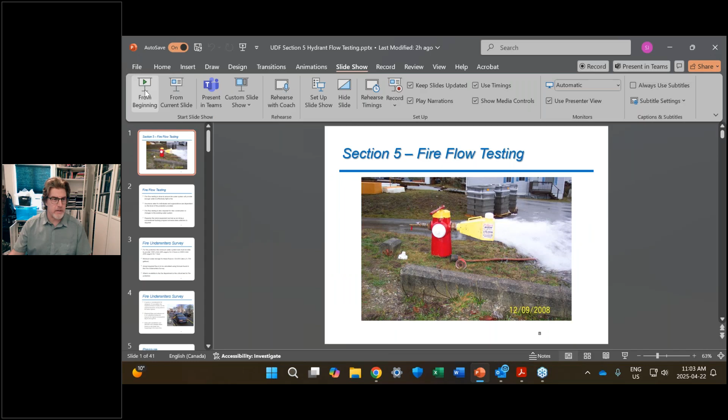Welcome everyone to this presentation on fire flow testing of hydrants. Now I know for some of you, or maybe a lot of you, this may not be completely applicable. You might not have a lot of hydrants in your system, or you might not have enough reservoir capacity to actually do a proper fire flow test. But it is something important to at least conduct for your system and have some idea of the hydraulic capacity of your system. So we'll run through the procedure here, and once again, if you have any questions, please put them in the chat, and we'll get to those at the end of the presentation.

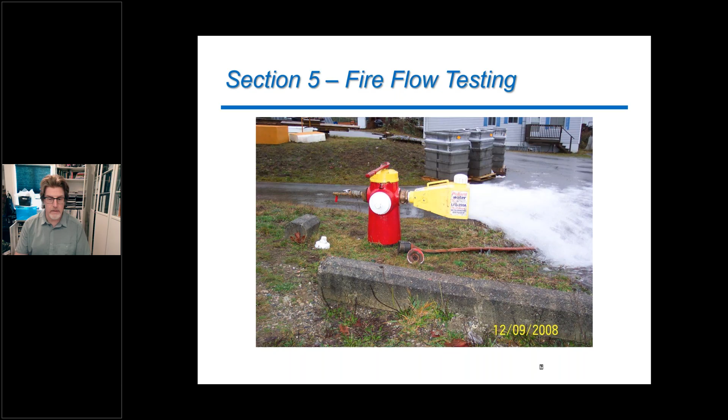So for fire flow testing, it is a way for us to look at the capacity of our water system and how that capacity might meet the requirements for fighting a fire in our system. The testing for fire flow is not that complex, but it does require some equipment and some testing to be done for the system itself.

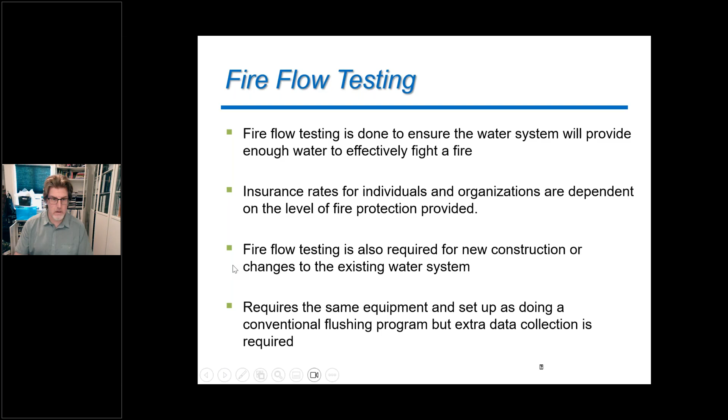The first thing is the Fire Underwriters Survey. This is the organization that insurance companies use to try to determine what the water supply requirements are for a system to be able to capably fight a fire.

Now we're going to look real quickly at a formula that they use, but there are a couple of benchmarks we look at inside the Fire Underwriter Survey. The first one, at the very minimum, your water system needs to be able to provide 1,000 liters per minute for 2 hours, or conversely, 2,000 liters per minute for 1 hour, to effectively fight a fire. So right away, that comes out to a storage capacity of 120,000 liters just to meet the very bare minimum for the Fire Underwriter Survey.

Now, that might already eliminate some of your systems as far as your reservoir capacity or pump capacity that you have available to you. There is an actual formula within the Fire Underwriter Survey that we can look at here.

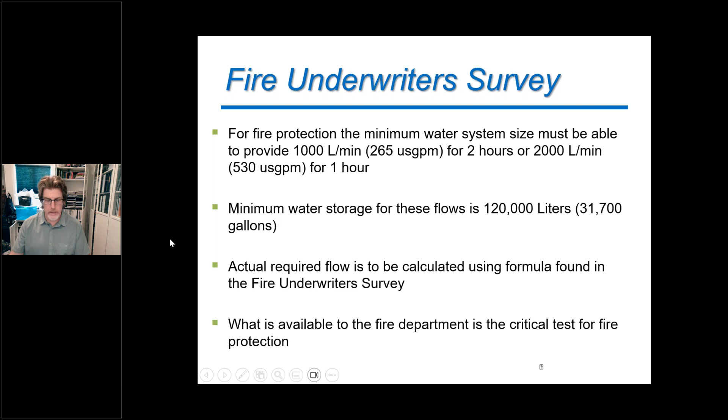I'm going to skip by that one. We're going to go to this one here.

One of the parts of the Fire Underwriter Survey and the fire flow testing is the pressure in your water system. The higher the pressure, generally the more water we can move throughout the system, and that's why a lot of small water systems may be installing fire pumps as part of their system, so that when we need a lot of water, we're able to push it out of our reservoirs and get it down to where it's needed.

One of the key things in fire flow testing is we look at the maximum amount of water we can move to a certain point in our water system while still maintaining 20 PSI throughout the entire system. When we drop below 20 PSI, that's when we enter a danger area for back siphonage into our water system. So we want to always maintain that strong positive pressure so we're not sucking water out of homes or other buildings when we are fighting a fire.

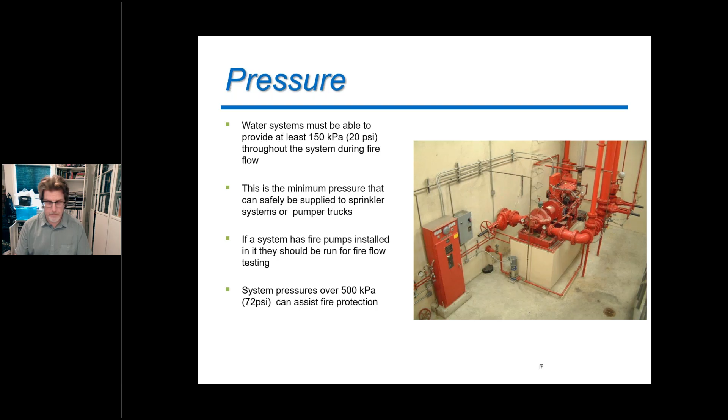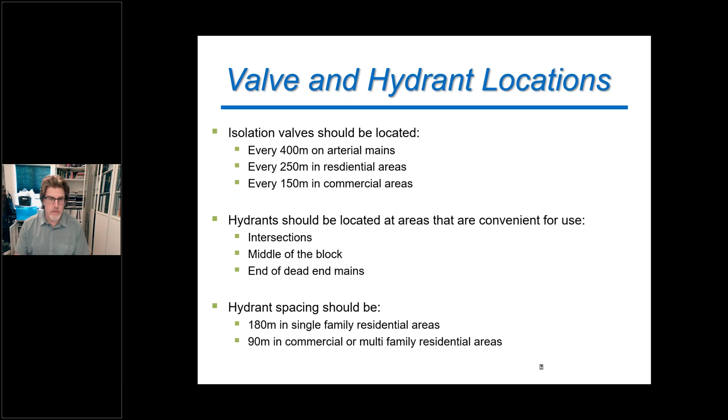The Fire Underwriter Survey also has quick points about where valves and hydrants should be located in your system, and they specify what type of hydrants you should have. One key thing is that fire hydrants should be supplied by mains that are at least 150 millimeters, or at least 6-inch mains, as a minimum, and that hydrants should have at least two 2.5-inch or 65 millimeter outlets.

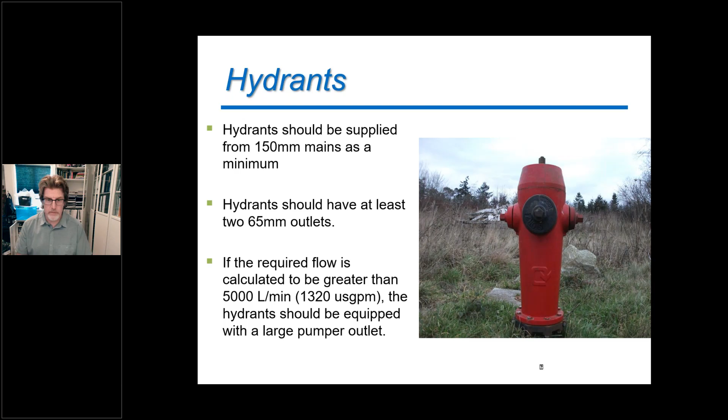If the calculated fire flow for your system, through the Fire Underwriter Survey, is going to be greater than 5,000 liters per minute, that is where you need to be able to provide a pumper outlet on your hydrant. If your calculated flow is less than that, around 4,000 liters per minute, you don't need a pumper port, but it would be advisable to have one anyway.

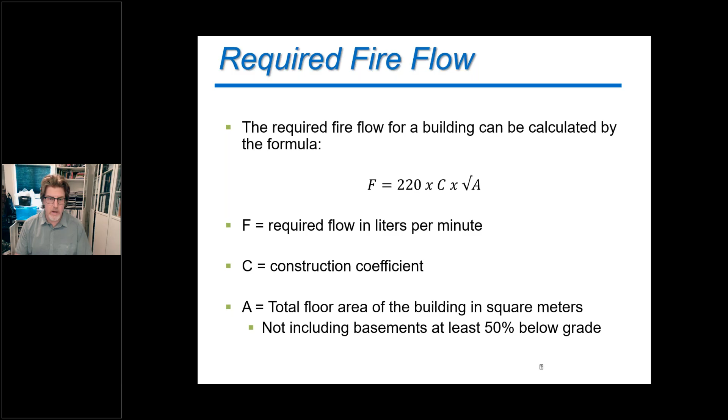From that formula, there ends up being more to it, and I'll go through this fairly quickly since it's not something you'd normally do. You have to add in the construction coefficient: what is the building built out of? Is it wood frame construction, or is it brick construction? That changes the flow that's required.

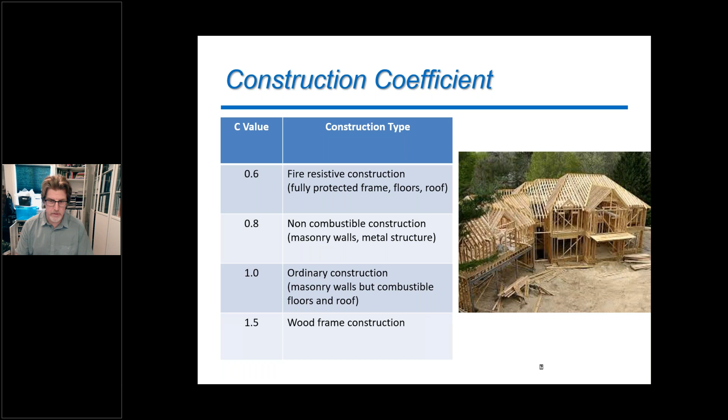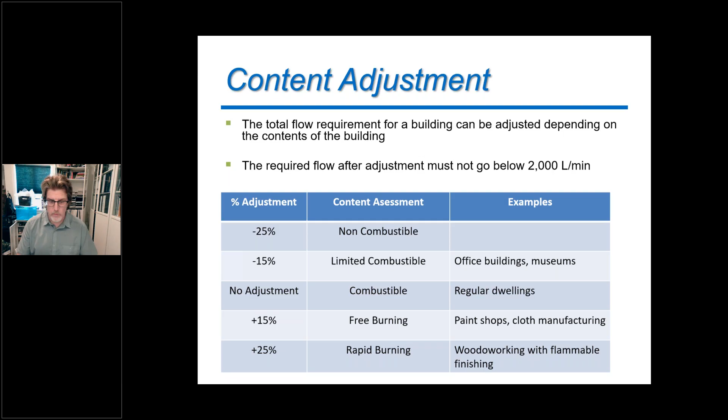What's going to be inside the building also changes the flow. Is it a woodworking building with lots of flammable finishes? That's going to increase the required flow. Is there a sprinkler system installed in the building? If there is, that will reduce the required flow needed inside that building.

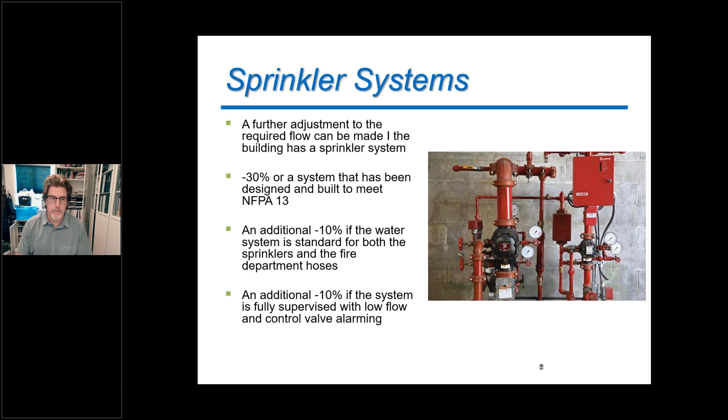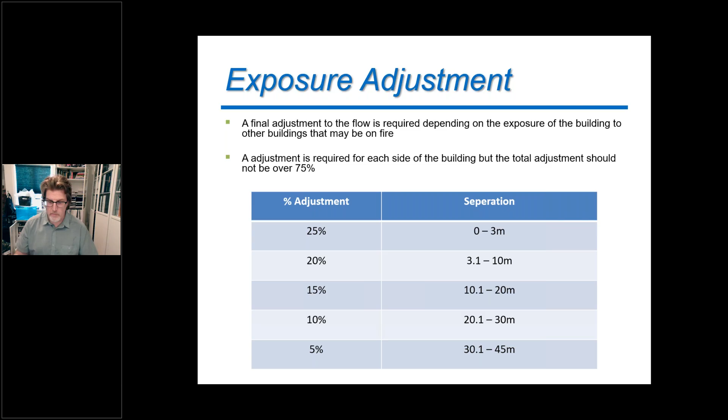This is a big one, especially in the last couple of years—we've heard this one quite a bit: what is your exposure? How close is your building to some other combustible building or material? How close is the tree line? How close is the neighboring house? If you have your homes packed in nice and tight together, we have to do an adjustment on the fire flow because of the danger of fire spreading to other nearby buildings.

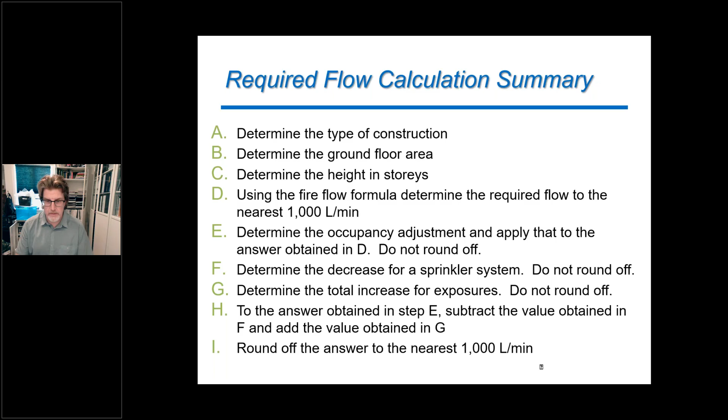Now we can add all those things together. We've gone from that very simple formula we started with, and now we add in all these increases or decreases depending on the specifics of the building we're looking at. From that, we end up with a value.

After all that, the Fire Underwriters Survey also gives you a shortcut: if we're just looking at single or multifamily dwellings that do not exceed 2 stories in height, we can just use the shortcut formula.

Generally for designing or measuring fire flows inside a system, we use 4,000 liters per minute as our benchmark, because that is seen as a 2-story wood frame building with exposure between 3 to 10 meters—so your neighboring house is maybe 10 meters off to the side, which is a pretty general way homes are constructed. So once again, we use that 4,000 liters, or just over 1,000 gallons per minute, as our benchmark when doing a fire flow test.

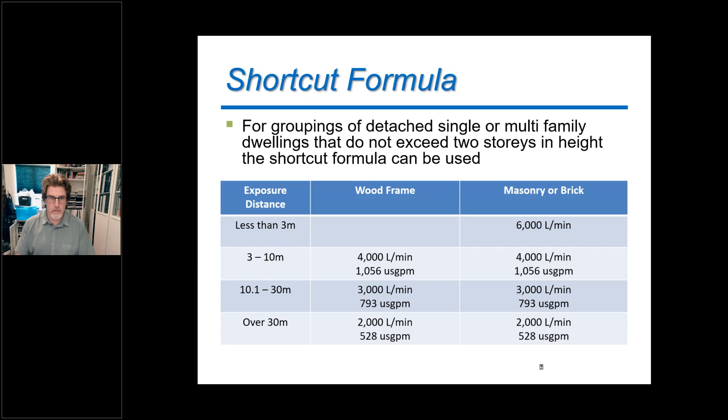Now we also have to make some very final adjustments too. If the home has cedar shake roofing, that's going to require a lot more flow than to try to fight a fire with our water system in those types of homes.

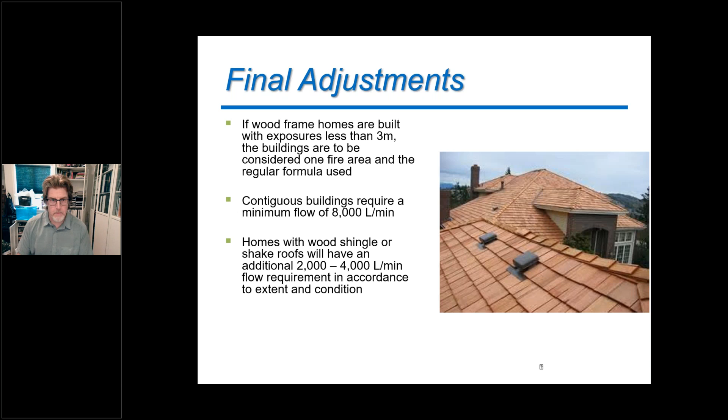We're not going to go run through a worksheet right now. This is something I do if we were in class, we would do a worksheet for the building that we were located in and try to work out that fire flow. But generally we just use 4,000 liters per minute, or 1,000 gallons per minute, as our bench line. If we can get higher than that, we have good fire protection in our system. If we're below that, then maybe we have to look a little bit more in depth, and see if there's something we can change about our system to provide better fire flows.

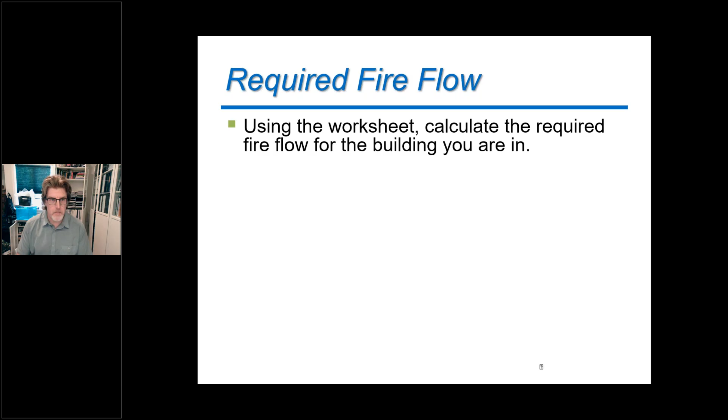Now, this also goes back to our reservoirs inside of our system, and this idea that a large portion of our reservoirs is really just based around trying to meet these fire flows. So we have a very small amount of space inside of our reservoirs that is actually just used for domestic water use, right? That's kind of the pump on, normal pump on, pump off -- that's our operational storage inside of the reservoir. But the vast volume of it is used for that emergency, or our fire storage.

And that's where, once again, we're looking at having 120,000 liters as a minimum in that emergency or fire storage. We need to be able to not only produce these flows, but maintain these high flows for long periods of time.

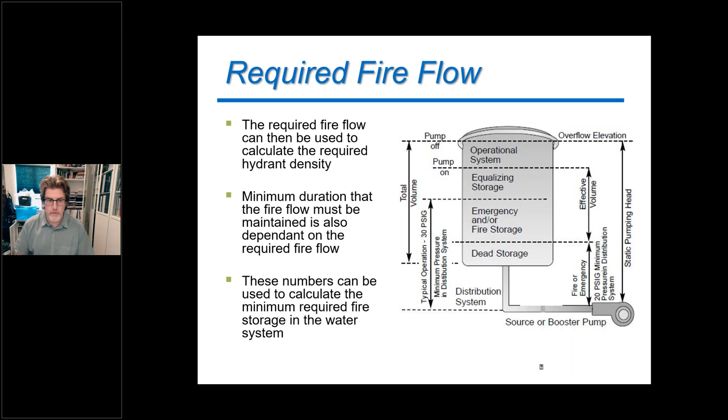So we've gone through, possibly done some calculations, or we've just said, hey, we're going to use the shortcut. I want to see, can my system deliver that 4,000 liters per minute if required? So what we're going to have to do is go out and do some field testing and see what that actually is.

So we're going to be using some hydrants. If you're looking very specifically for one of the buildings inside of your system, you're going to be using the hydrant that is located closest to that building.

Now, the values that we get from this, we can extrapolate that data. We can look at trying to make some changes to the water system infrastructure, maybe if our fire flows are not meeting those minimum values. So whether that means we have a case to build a larger reservoir, or a case to upgrade the water mains to a larger size, or possibly loop those water mains because we're not able to meet the flows that the Fire Underwriters Survey says we should have to meet.

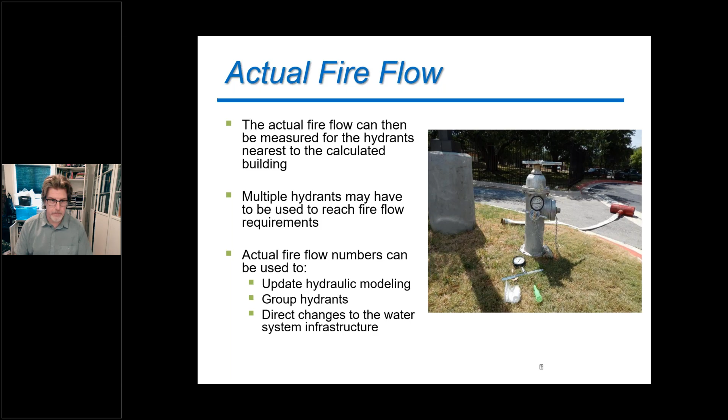Now, one thing to be very clear here as we go through the next few slides, and there's a handout available to you, is that when we're talking about fire flows here, we're talking about the main capacity. So what is the maximum amount of water that we can draw out of our water system at a certain point in our water system?

Now, if a lot of you have maybe done some hydrant flushing and you've put a diffuser with a flow meter while doing hydrant flushing, that's great, really good information, and that's actually part of the fire flow test. But that is something we call the hydrant capacity.

So, what is the normal flow coming out of a port of the hydrant when we open it up? Once again, for fire flow testing, we're going to look at what is the maximum we can take out and still maintain that 20 psi in the water system. So that is what the fire flow test is going to be.

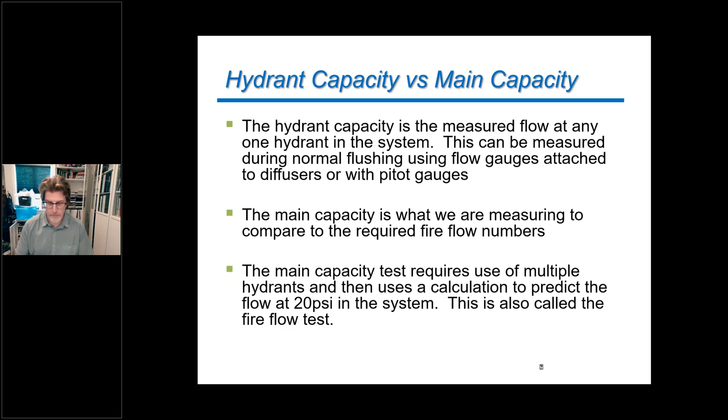So to do this, we use a lot of the same procedures and equipment that you might be using as part of your regular flushing, or part of your regular maintenance on the hydrants. But we still need to go through proper planning. What are the hydrants we're going to flush from? Make sure we have all the proper equipment available to collect the data we need for the fire flow test. We also have to pay attention -- we're not going to be flowing water for long periods of time or large volumes of water, but we need to dechlorinate that.

We need to make sure we know where that water is being discharged, so we're not flooding out someone's driveway, or making sure we have that discharge under control. We also want to make sure we have lots of water in the reservoirs.

So, is our reservoir full when we are going to do this test? Another key thing for fire flow testing is if you do have a fire pump, the fire pump should be running when you do this test. As I mentioned, we're only going to be running the flows for very short durations, just to collect some data from our system.

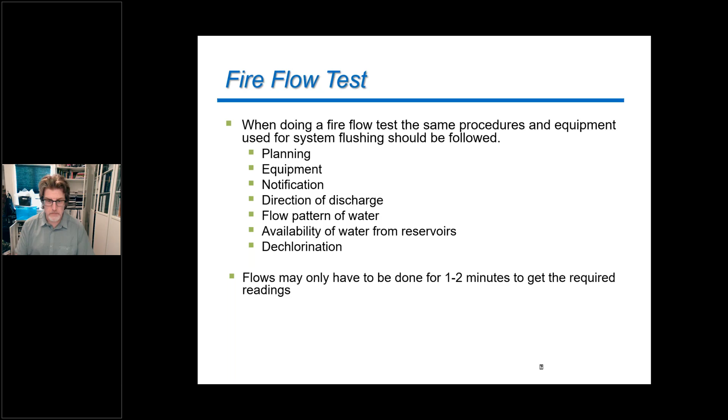But this is the hydrant that we are going to add a pressure gauge to, and we're going to measure the pressure constantly at this hydrant while we are conducting the test.

Now the flow hydrant, that one is the next hydrant downstream from our test hydrant or pressure hydrant. That is the one we're going to add our flow measuring equipment to. This is very key. This is the one we're going to open up and start discharging water, but we need some way to accurately measure the flow coming out of that hydrant.

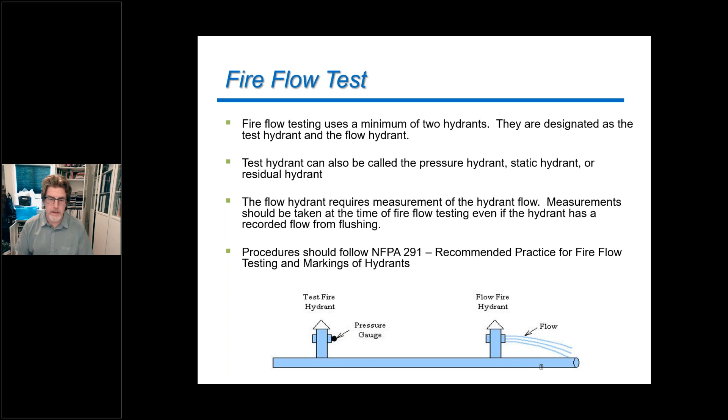So in its simplest form, this is what we're going to do. We're going to look at our system and designate, okay, this here is my test hydrant, and the next hydrant downstream is going to be my flow hydrant.

I'm going to go to the test hydrant, put a pressure gauge on it, open that hydrant fully, and measure the static pressure at that test hydrant. Then I'm going to go downstream and look at the flow hydrant, and start documenting some information.

What was the size of the water main that is going between these two hydrants? What is the inner diameter of the hydrant nozzle that I'm going to use? Is it a 2.5-inch nozzle, or is there some other manufacturer with a slightly different size?

I'm going to show a diagram here later, but we're also going to look at the hydrant nozzle. How smooth is the transition inside of the hydrant going to that nozzle? Is it a nice curved edge, or is it a harsh 90-degree sharp edge between the inside of the hydrant and that nozzle? So I need to record that information.

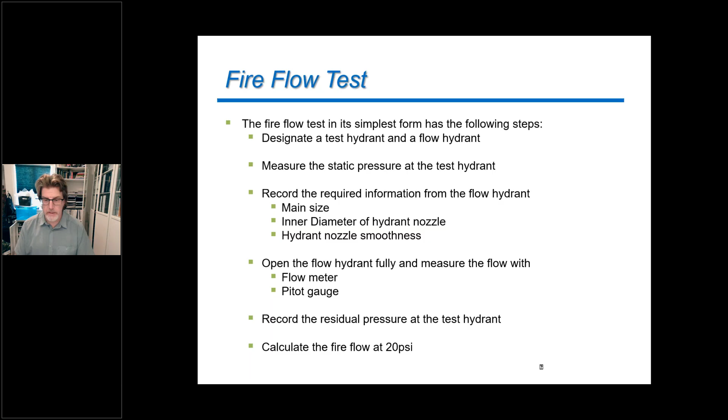The other thing you can do if you have a loop system is run the test in two different directions. So you can open up hydrants on both sides of the hydrant you're measuring the pressure from, and compare the results. The results should generally be close to one another, but it's a good way to also confirm what the flows are that you're getting with your system.

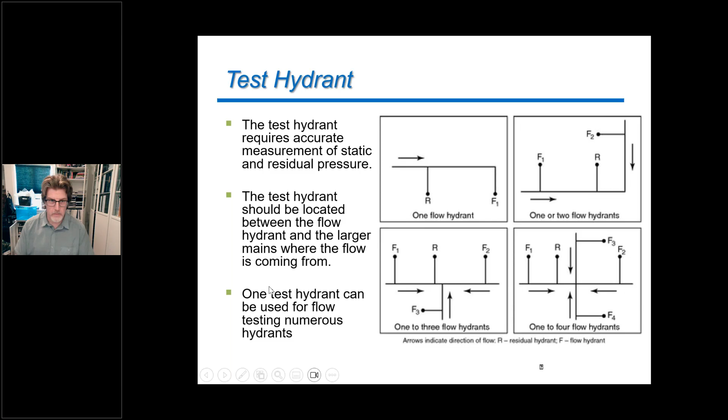Now for the taking of the pressure, this one is very, very important. Like any type of calculation, you have to put good data into the formula to get a good result. So the more accurate that you can measure the pressure, and we're going to show later here, the more accurate that you can measure the flow coming out of the hydrant, the better your results are going to be.

If you are just using a direct read pressure gauge, then the more accurate that pressure gauge is to the maximum or minimum pressures you're going to achieve in that system, the better off you are. So once again, if your normal pressure in your water system is only 60 psi, then using a 0 to 200 psi pressure gauge is not going to give you great accuracy for your readings. You're going to want a pressure gauge that is a little tighter and closer to the pressures in your system. If you can get a 0 to 100 gauge, that will improve the accuracy of your readings.

You also, if you're doing this with two people, which is very common, will have someone standing down at the hydrant recording the pressure, while you are recording the flow. Once you have taken that flow reading, you need some way to alert the person at the other hydrant that it's time to take your pressure reading again. And if you don't have two people, or you want to improve your accuracy a little more, one of the things you can look at is adding some sort of pressure logger onto your test hydrant.

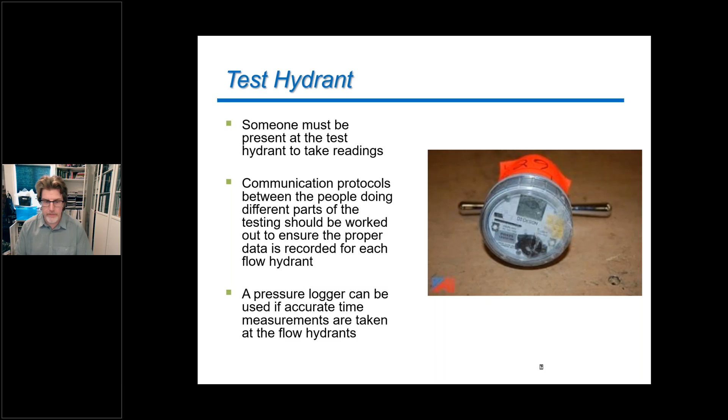So once again, if let's say your static pressure in your system is 80 psi, when I open up the fire hydrant, I want to see that pressure in the residual hydrant drop to at least 60 or lower. If it doesn't go below 60, then I need to increase the flow. The higher the flow I can get, the more pressure drop I should see. So I might have to open up a second port on the flow hydrant, or change my setup and maybe flow 2 hydrants at the same time to get enough flow to see that pressure drop.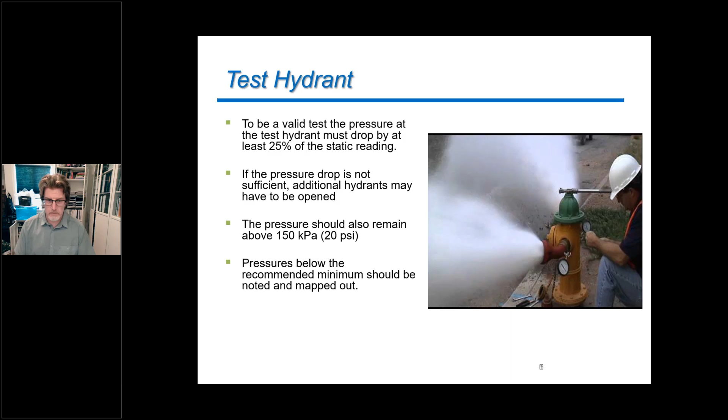Now, if you have one with a very sharp or 90-degree bend inside the hydrant going to the port, you need to note that because you're going to use a different formula. This relates to the flow pattern the water has to make - if it has to go around that sharp 90-degree bend, we get large friction losses, meaning less flow out of those types of hydrants. That's why most modern hydrants have a nice smooth inlet going from the inside of the hydrant to the outlet port.

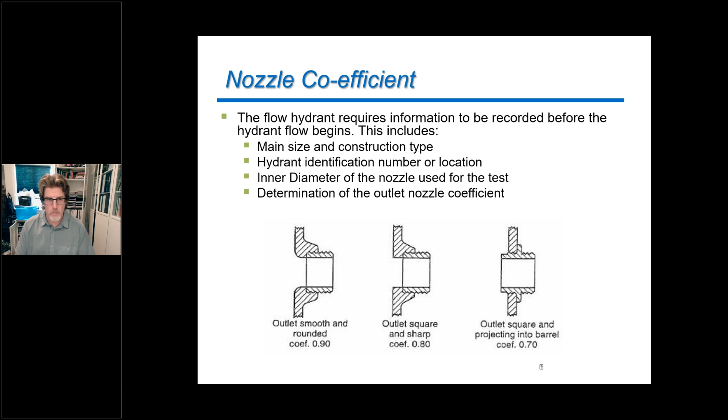Now, measuring the hydrant flow - we're going to have the hydrant open fully. If we've got a fire flow pump, the pump is running, and we're trying to get the maximum amount of flow that we can out of here. We've got to have some way to accurately measure that flow.

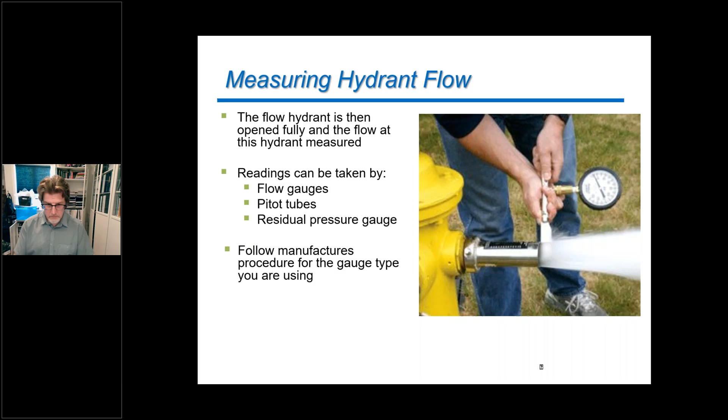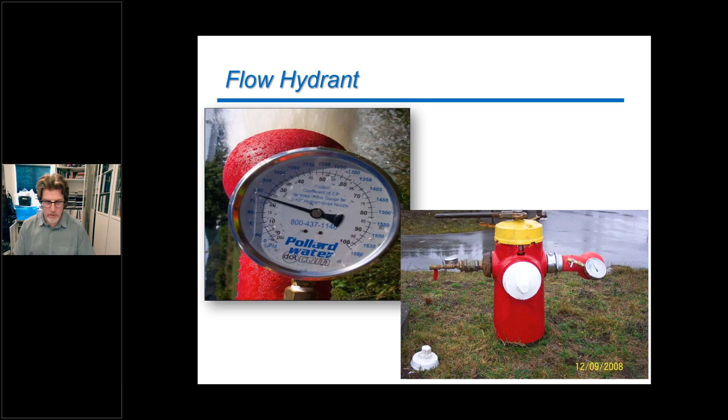It's also a good way to check that your pitot is working. But if you didn't have the pitot shown in this diagram, this is a way you can try the measurement. Let's say my pressure when I started the test, when it was static, was 80 psi, and when I was flowing the hydrant at its maximum, the pressure was 40 psi on the opposite ear of that hydrant. I could look at the chart, and it would tell me my flow is 961 gallons per minute because I had a 40 PSI difference between the starting pressure and the reading when the hydrant was fully open.

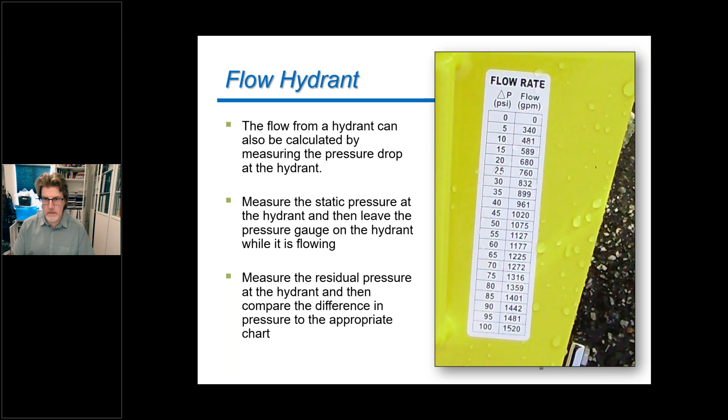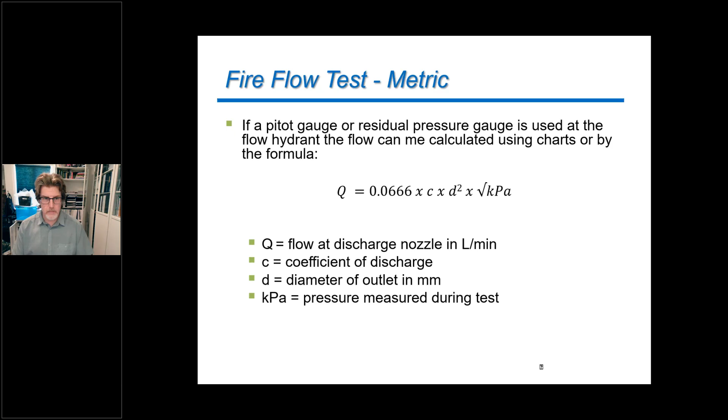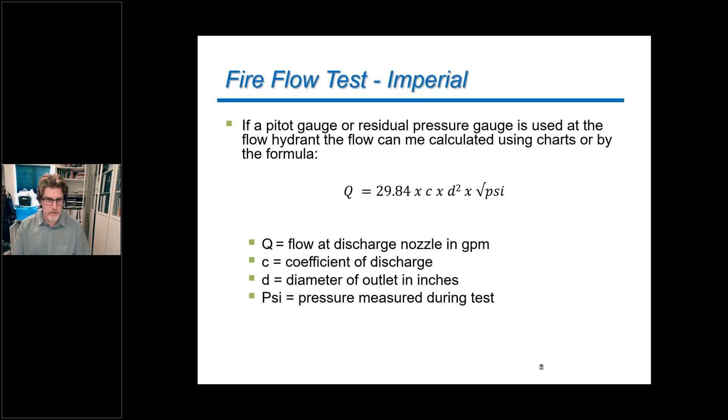I'm going to skip by that, and we won't do an example here, just to make sure we save time.

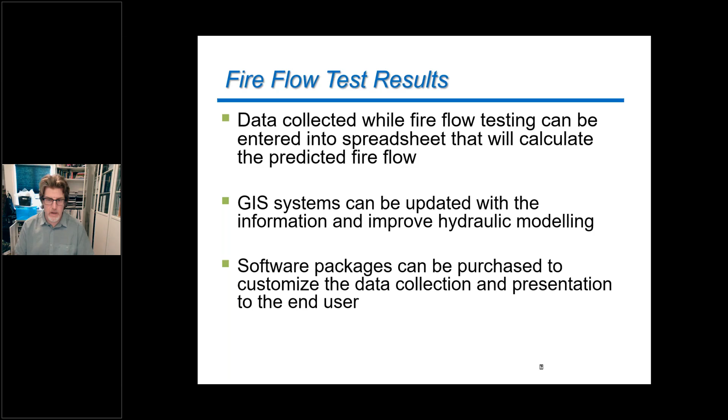Now, when we get the data that we've collected from our fire flow test, we can enter that into a spreadsheet, and we can use this to calculate predicted fire flows for later events. If we're working with an engineer who wants to do hydraulic modeling of our system, this would be great data to give them to help their modeling system.

Now, this is what we do with the results. This is a very simplified graph that we have. But hopefully we remember back to grade 5 geometry, when we did graphs, one of the things we were taught was that if at any time you have 2 points, you can draw a line.

So in this test, for this one example, we had 2 points of data. I had 0 flow, and I tested the fire hydrant, and when there was no flow, the static pressure in the system was 75 PSI. So that is 1 point of data. Then we conducted the test, and my second point was down at the bottom of the solid red line. When the flow was about 4,500 gallons per minute coming out of the system, the pressure was about 28 PSI. So if I have 2 points, I can draw a line.

Now when I draw my line, I can extend it and see where it crosses the 20 PSI limit. And that is what our fire flow test is trying to determine: what is the maximum flow we can get in the system and still maintain 20 PSI. In this case, this one crosses the 20 PSI line at just under 5,000 gallons per minute. So, a very large system with lots of flow available from the hydrants here.

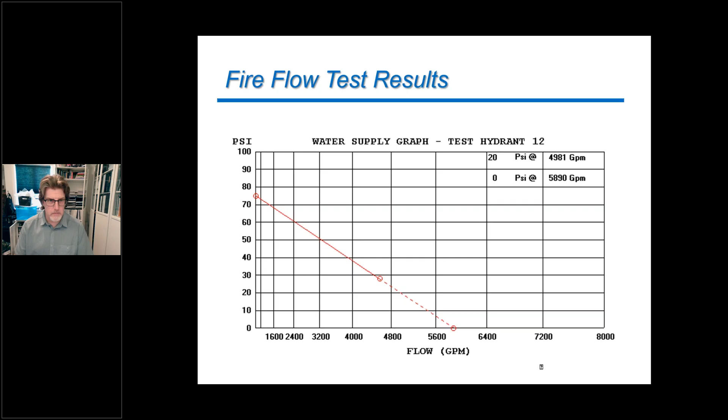Now, the other thing we can do once we've finished the fire flow test is follow the Fire Underwriters Survey color codes that you should paint or identify your hydrants with, depending on the flows available. This indicates to the fire department coming to serve your neighborhood or small water system quickly: hey, at this hydrant I'm not going to get a lot of water because the top and nozzle colors are painted red.

Or they show up and it's light blue, and they know this hydrant will give them a lot of water. So they can hook up to a pumper port and connect their pumper truck to this hydrant because there's going to be lots of water available at this point.

Now, this is something I don't see a lot of small water systems doing, is color coding their hydrants. This isn't the body of the hydrant, we're just talking about the very top cap of the hydrant here. But if you keep your eyes open in some of the larger municipalities, you should notice this.

You'll start seeing that their hydrants are all red, but in this neighborhood the tops of the hydrants are blue. And moving on, the tops of the hydrants in this neighborhood are green. That's just a way to quickly identify to firefighters what type of flow they can expect from the hydrant when they hook up to it.

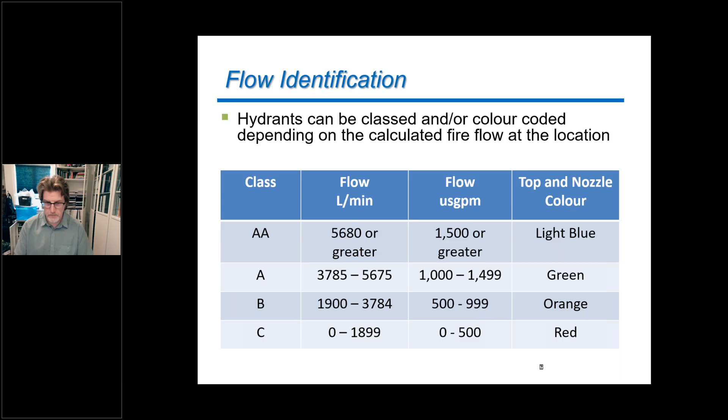So these are just some pictures of different hydrants and what we're going to do for the color coding. Once again, it's not the body of the hydrant that we're looking at, it's the top cap of the hydrant that we are painting the color that corresponds to the flow that is available.

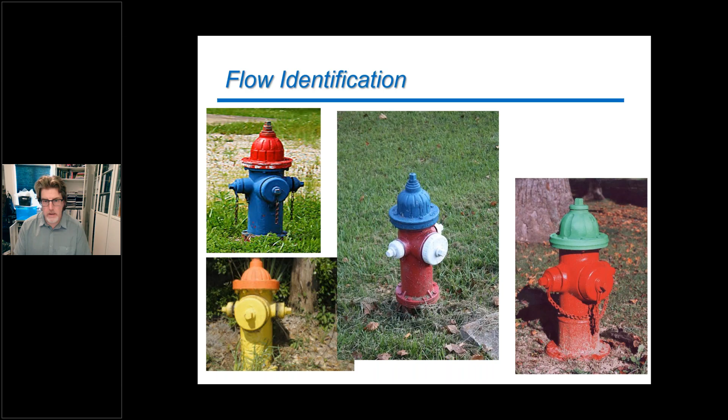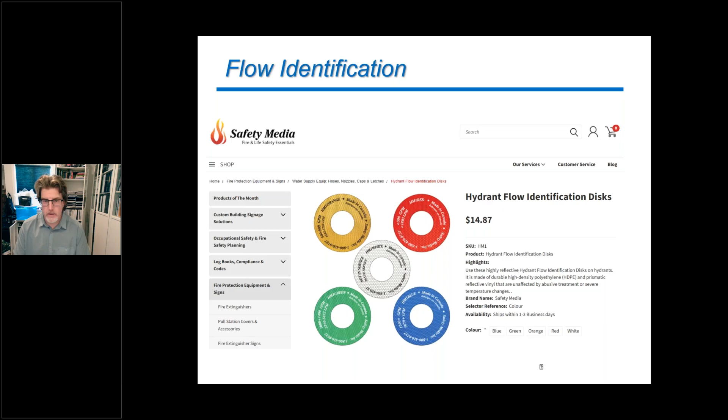If you don't want to paint the hydrants, another popular option is to use hydrant flow identification discs. You can buy them in the different colors you need and attach those onto the side ports of the fire hydrant. So what you end up with is something like this diagram here, where they've done both - they've painted the top of the hydrant the proper color code, but also added the disc to the side port.

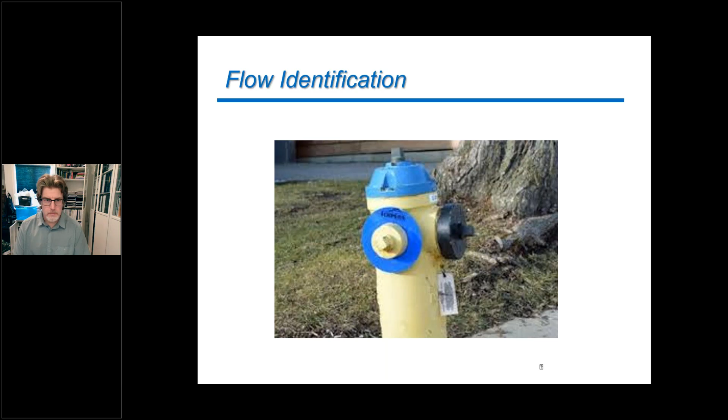I'm going to now quickly show you some of the shortcut stuff here. One of the main companies you might be buying diffusers from is called Hose Monster. This is their hydrant flow test calculator that they make available. If you do a Google search, just type in hydrant flow test calculator and there will be a never-ending list of different ones you can use.

I find this one is the best one that's readily available. Once again, rather than doing that complex calculation when you have your data, you can go to their website and just enter your data into their calculator. It's going to come out in gallons per minute, and they're going to use PSI, so make sure you take your readings in that case.

So in this example, I said, hey, I've got my small water system. I went and measured the static pressure - before I started flowing water, it was 60 PSI. Then I opened up the hydrant fully, and I got 600 gallons per minute flowing out of my flow hydrant. So that's another data point I've got.

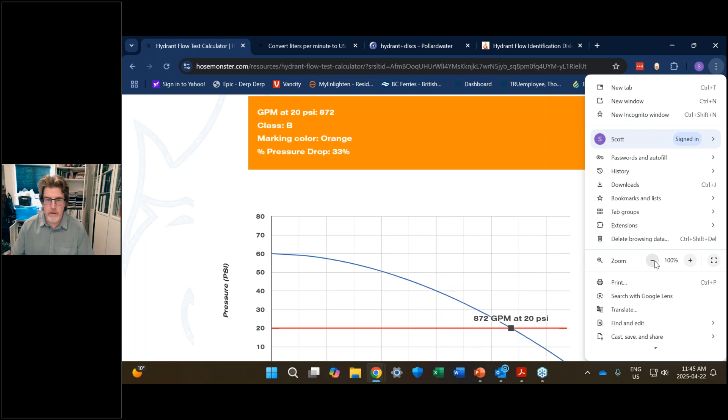I can press the calculate button, and I can scroll down and they give me the data for my hydrant here. I'll make that a little bit smaller so it all fits. They give me the graph and they give me the calculation.

So they say, well, from the data you gave, yes, you got the right pressure drop, but this is going to be an orange coded hydrant. And at 20 PSI, the maximum you're going to get out of that hydrant is going to be 872 gallons per minute.

So for that hydrant, one of the things I would look at right away is - I could go back to the Fire Underwriters Survey and they would be able to tell me that for a single family 2-story home, the minimum is supposed to be 1,056 gallons per minute. So I'm not meeting those minimum fire flows that are required to provide fire protection in my system.

So at this point, I would have to start looking at how am I going to change my system? Am I going to have to install a fire flow pump? Do I need a larger reservoir to give myself some extra capacity and maybe have that reservoir be a little bit higher, which will give me more pressure in the system and increase my flow? Do I need to increase the size of the water mains? Or do I need to loop my system to get more flow at this point?

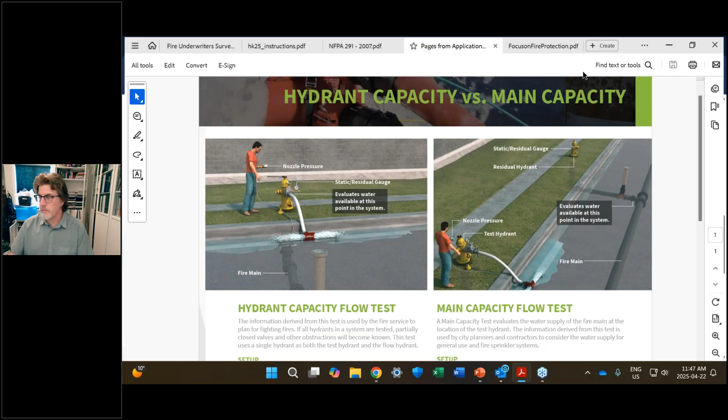This is one of the handouts to show the difference between your regular hydrant maintenance and measuring flow during that, compared to what we're talking about here, which is the main capacity flow test. That's what the fire flow test happens to be.

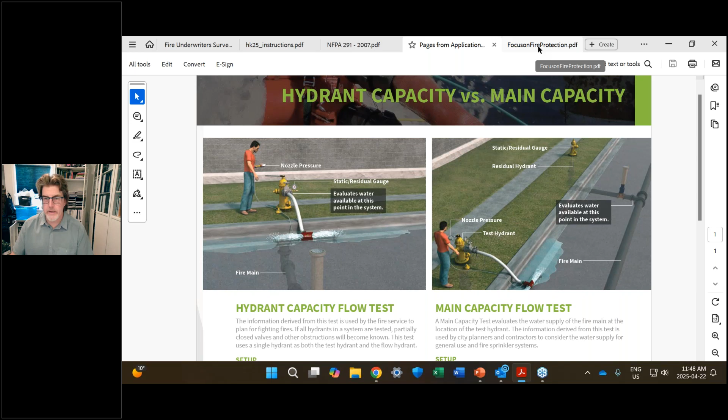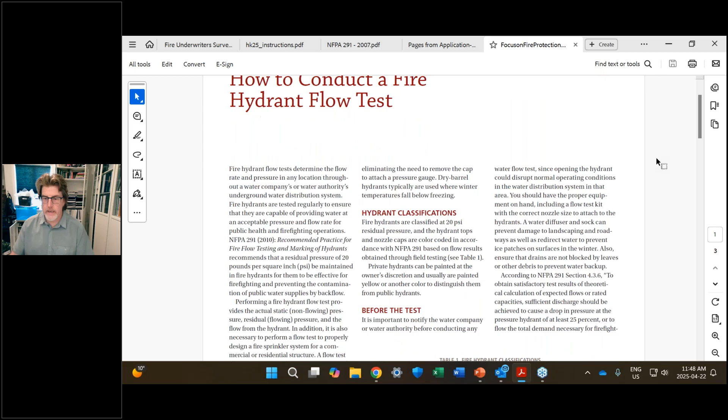They'll make my presentation available to you if you want to follow along. I also added some handouts that have been in some trade magazines, which also run through how to do this test, what measurements you have to take.

And how to do the calculation for that test. This is something recommended that all systems do at least once every 5 years, or any time you've made large changes to your infrastructure. So if you've installed new pipe, or changed the flow pattern by closing off or making a loop in your system, you can go back and check how those changes have affected your ability to fight fires with your system.

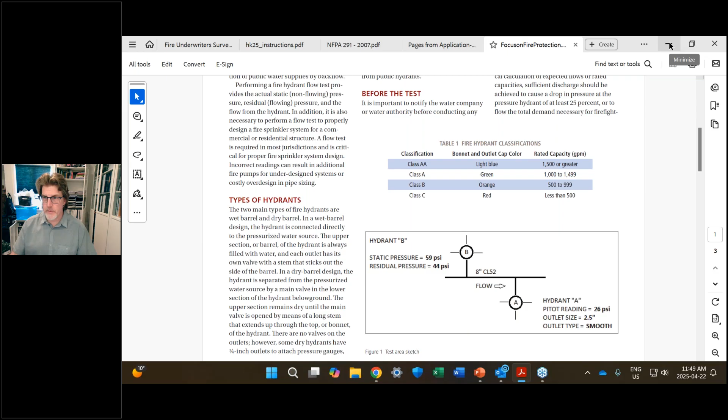That's all the information I have at this point. So I'll turn this back over to Satwinder, and again, just see if you have any questions about what we presented here today.

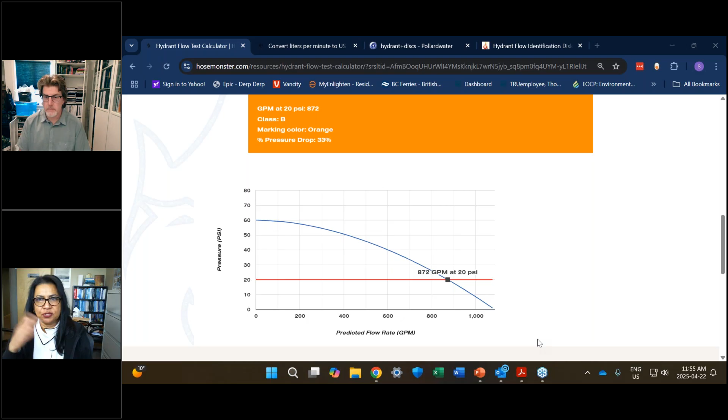So if your community is going through a growth period, should that testing be done more frequently? Yes. The 3 to 5 years is the recommendation if your system has not had any large infrastructure changes. Anytime you do upgrade pipe sizes, close off loops, or add a new subdivision and new section of piping onto your system, you should redo those fire flow tests.

Question from John: why is the pressure drop of 20% important? I know you said in your presentation 25%, but yeah, why is that pressure drop important?

John, that's people who are much smarter than me and work in stats that have come up with that benchmark to try to determine that the data is going to be able to make a good line. When you're extrapolating data like this with a line, if your two points are very close together, that just increases the error when we're extrapolating that data further away from those points. So by making sure we have that 25% drop in pressure, it's just a way to guarantee our two data points are a little farther apart from one another, and then we can extrapolate those data points.